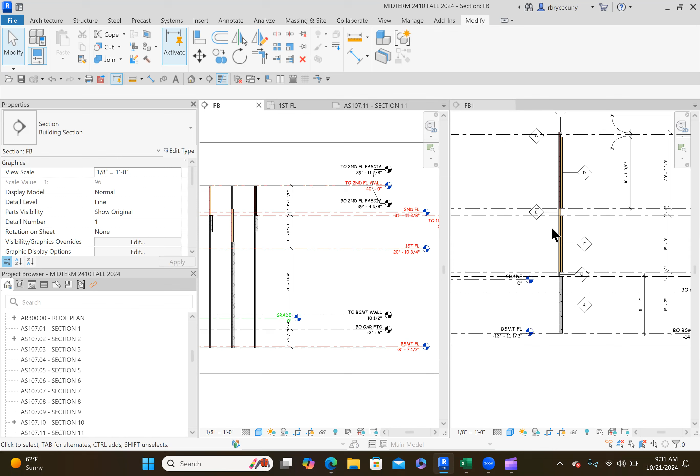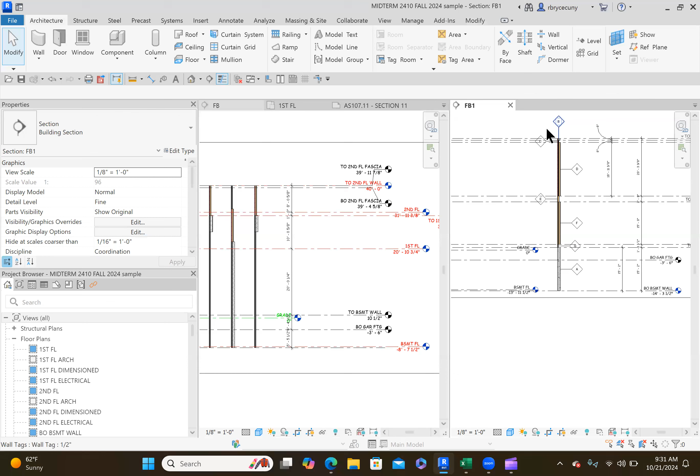Let's say that this was your handout. I'll give you a handout PDF, it'll be online, but take a look at it. Let's say this is the wall you want to duplicate. There's a couple ways to go about it. First is to get the levels correct and then make your stacked wall have these components. We've already made these components, but we haven't set up what they're supposed to be yet in terms of the composition of each wall type.

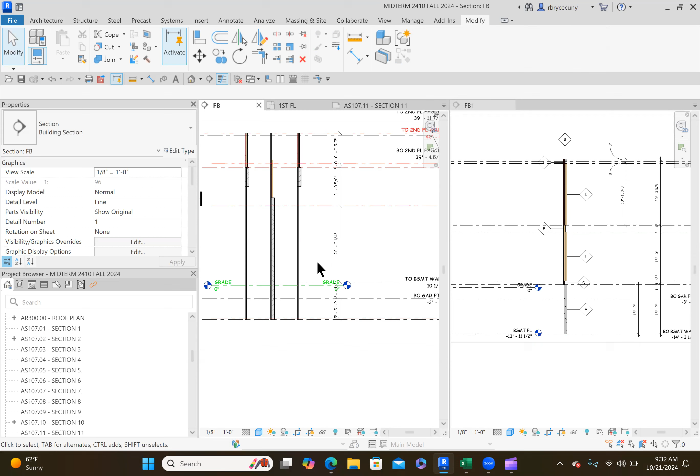So let's do the levels first. This is the handout, an example of your setup that you're bringing into class to begin with. So we'll take a look. There's a couple ways we could do this. Let's take a look.

The basement floor is minus 13 feet, 11 and a half. So we could simply do it this way. Minus 13 feet, 11.5 is the same as 11 and a half.

Now the bottom of the basement wall is 14, 3 and a half. So let's find the bottom of the basement wall. We don't have the label on this side, so we'll click this little box here and put the label there. We change that to the bottom of the basement wall is minus 14 feet, 3.5 inches. Okay, that'll put it down where we want the level to be for our project.

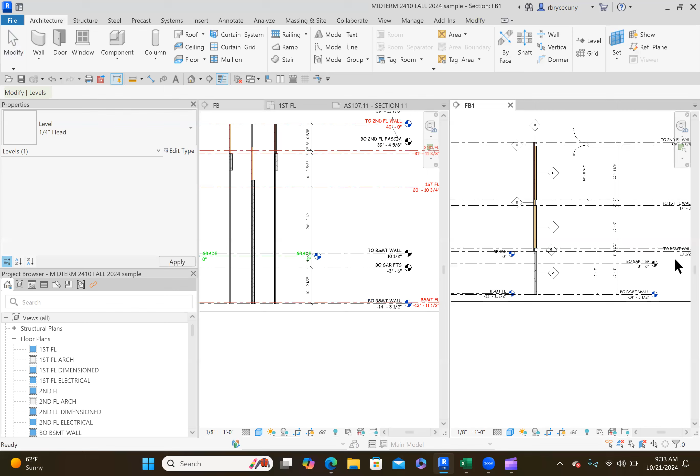And the next one is the bottom of the garage footing is minus 3 feet 6 inches. That's good. Top of the basement wall is what? Let's see, that's the top of the basement wall, 10 and a half inches. Okay, that's already there. The first floor is 2 feet.

Well, here's our first floor. Let's change that to 2 feet. We just click on it and let's unlock it. Let's keep these, this might be for the alignment, but anyway, 2 feet. We're going to change that level to 2 feet.

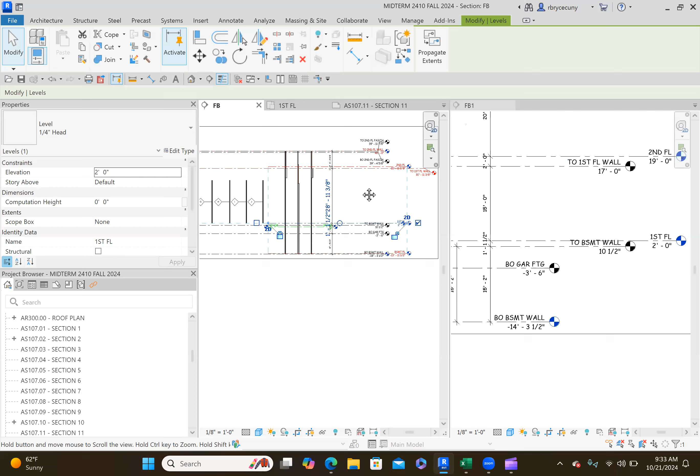Now the top of the first floor wall, where is that one? Here we go, top of first floor wall, 17 feet. And so what's left? Second floor is 19 feet, so we change that to 19 feet.

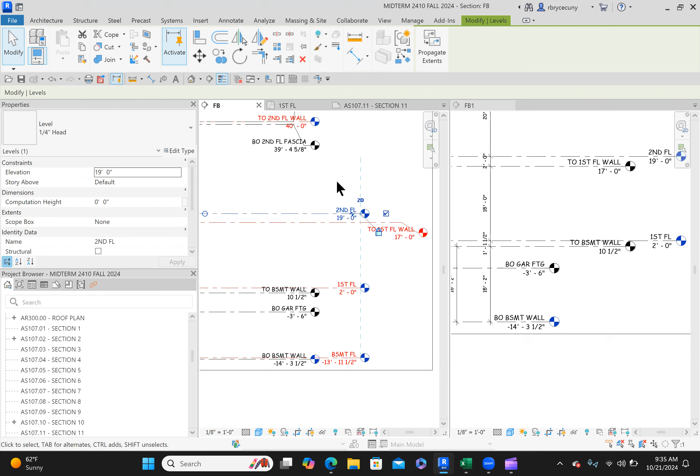And the top of the second floor wall is 39 feet, 3 and 3/8 of an inch. Okay, so let's fix that.

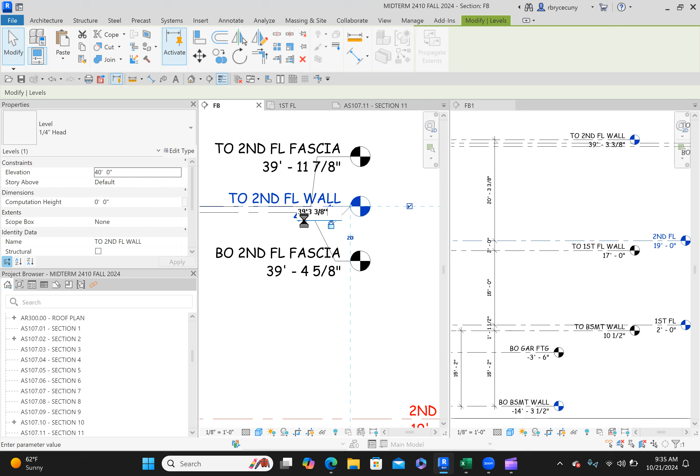And from there, we go down 8 inches and up 8 inches for the top of the fascia and the bottom of the fascia. So let's do that with dimensions. We're going to put our dimensions in here. Let's do that one too.

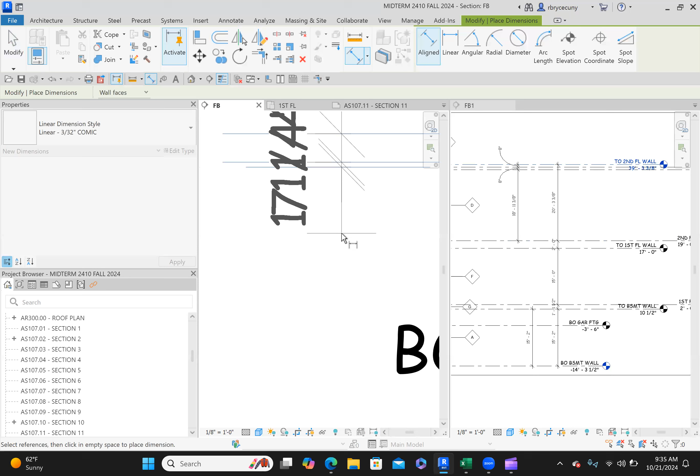Okay, so we can't see that. We can't really read them. So let's get them out of the way. So that's supposed to be 8 inches.

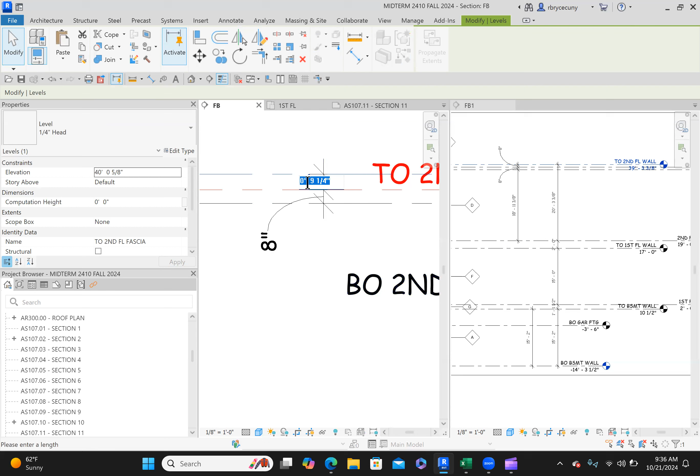So then we'll just click on this one here. We're clicking the object that we want to move when we change the dimension. And then let's grab this one and just drag it down so that it's below. Then we'll click on the object and say that should be 8 inches also. We wanted this to be 8 inches, but for some reason it's 9 1/4. So let's make it back to 8 inches.

Okay, and double check this. The top of the second floor wall should be 38 -- no, that's the bottom of the fascia. 39, 3 3/8. Okay, so everything's good. We can double check with our dimensions here. 20 3 3/8, yeah, 2, yeah.

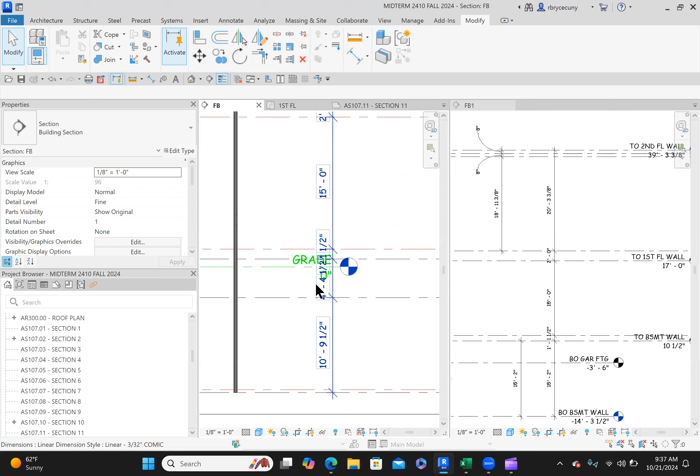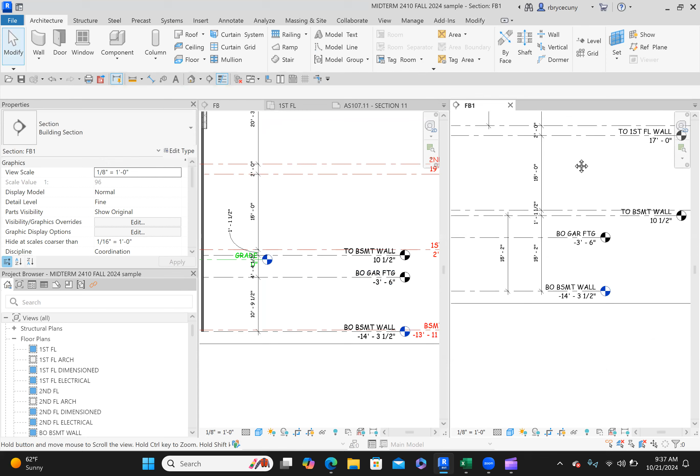Activate this view, top of the basement wall, and then 2 feet. Okay, let's see what's going on here. This should be 2 feet. We want to drag this over. And it is right, 10.5, 1 foot 1.5. That's correct. This distance is the one we don't know.

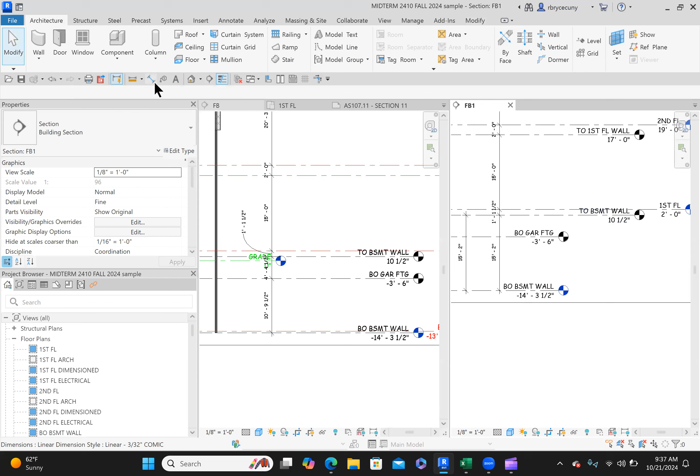So let's put a dimension in. Of course, I will give you this information. You don't have to do any kind of measurements on the handout. But let's see, what is this? 4 foot 4.5. Okay, so it's right. 4 foot 4.5. Okay, so that's step one. We get the levels right.

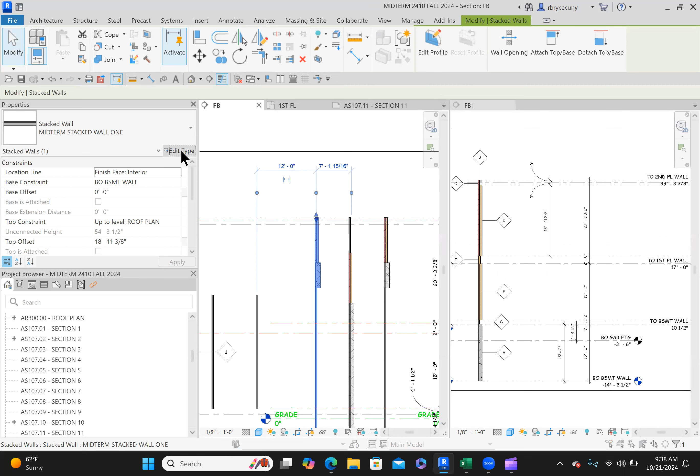Step two is we're going to change this so that it's made up of these components with these wall types. So let's click on our stacked wall, and we'll edit the type, and we'll edit the structure, and it's going to be B, C, D.

So the first one will be B. Let's see if we can find B. The second one will be C. We're looking for C, it is alphabetized. The next one is D. We're looking over there, it looks like a D. The next one is E. So we don't have any more, so we need to insert some more.

Okay, so it's B, C, D, B, C, D, E, F, G. Okay, that looks pretty simple. E, F, G, and I think we might have some more.

All right, let's see what we can do here. A, A is the bottom one. So we don't have one. We'll insert another row and we'll just make that A. Looking for A, there it is.

Now, what are the heights? Well, we know that 8 and 8 for those two. So we're going to change the height of that to 8 inches. We're going to change the height of that one to 8 inches.

Wall type D is 18 feet, 11 3/8. And that next one is wall type E, and it's 2 feet. Wall type F, 15 feet. And 1 foot 1.5 for G.

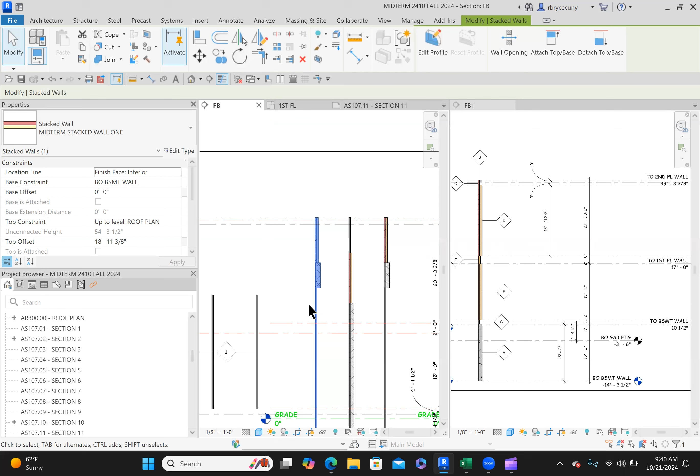And A is our variable, so we always want A to be the one that stretches. Okay, so let's say okay and see what happens. And it changed to exactly what this is made up of, letter-wise.

Now I'm concerned about this not lining up as it should. So I might have made a mistake here. Let's go back and edit the type again just to double check.

8 inches, 8 inches. This one is 18, 11 3/8. Yeah, 2 feet, 15 feet, 1 foot 1.5. Okay, that was wrong. 1 foot 1.5.

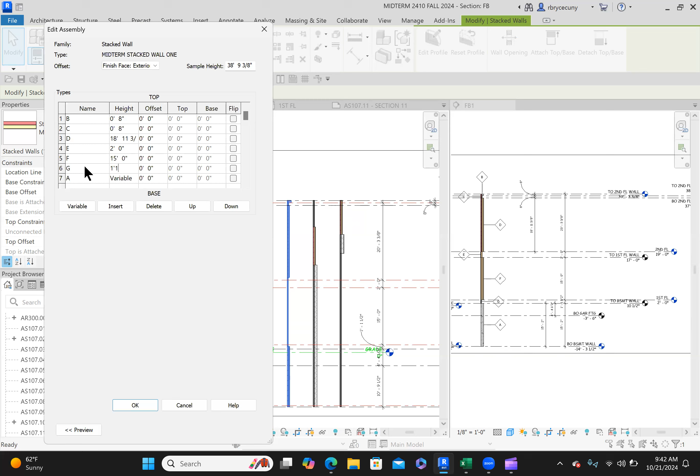All right, so it's telling me I've done something wrong here. 1 foot 1.5 inches. Let's see what happens now. Because we know that the walls, so that's 8 and 8.

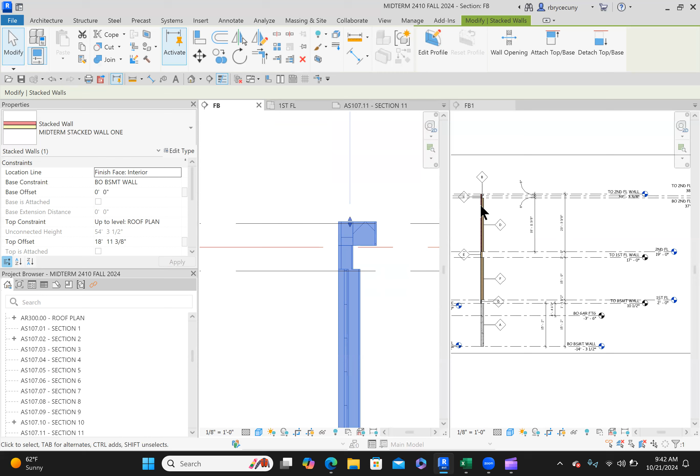And oh, here's our issue right there. Where is the top of that wall? The top of that wall should be the top of the second floor wall. Oh, and see, we got it set to the wrong level. Top of second floor wall. I like to show mistakes.

Okay, and it's top of second floor wall, and then it said add another 18 feet. So let's go back and say don't add anything to it, make that to the top of the wall, which it did. Okay, but I've got something wrong here because it should be the top of the wall plus 8 inches, right? Because this middle layer is that.

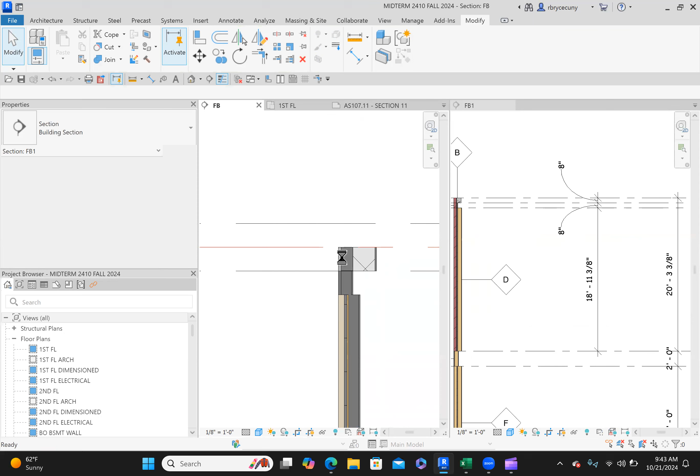So let's add another 8 inches to this wall. We're looking for the properties of this wall, so we're gonna, and then it should go up another 8 inches. See what happens. So we would say go to the top of the second floor wall, but then go up another 8 inches from there.

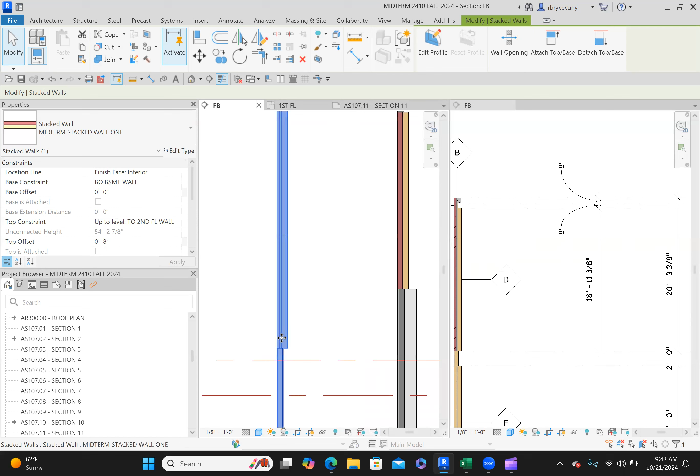All right, now see, I'm still confused as to why this isn't lining up. I like to show my mistakes, so let's try to figure out what that mistake is. 20 foot 3 3/8, 20 foot 3 3/8. Ah, here we go, look at that. That 20 foot 3 3/8 should be all the way up to there.

Okay, so let's fix it. Let's drag this guy up here.

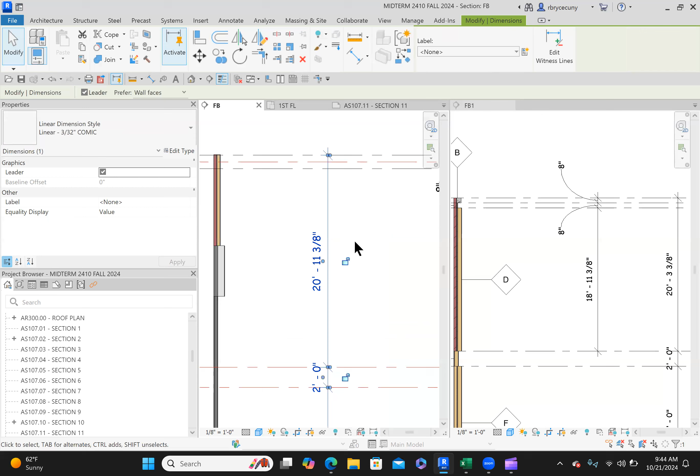And then I want to just do it, and then we'll fix the other ones. So I put it to the wrong place. 20 foot 3 3/8 of an inch should be to the very top of this assembly, and then 8 inches down for the red line, which is the level. So I want to make sure I grab the right one, and it's not the top of the fascia.

It's the top of the second floor wall. I can just drag that down any amount that I want, doesn't matter. And then I'll put the dimension in of 8 inches, and Revit will put it exactly where I want it to be.

So you can see that Revit did exactly what I told it to do, but I didn't tell it to do what I wanted it to do, because I made a mistake about looking at where that 20 foot 3 3/8 goes to. That's a possible mistake you might make, so you can double check. We always want to continually double check our work so that it makes sense.

You can see down in the corner here, our processing is done. Okay, finally. So I'm going to try to zoom out.

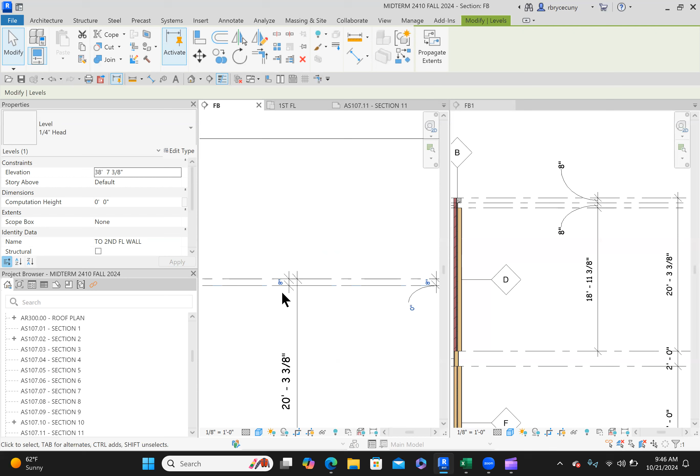So now, let's see, I have 0 inches between the top of the second floor wall and the fascia. I can't really grab it. Maybe I can, let's try to do that. We'll just pull it down and see what happens. Okay, I was able to grab it.

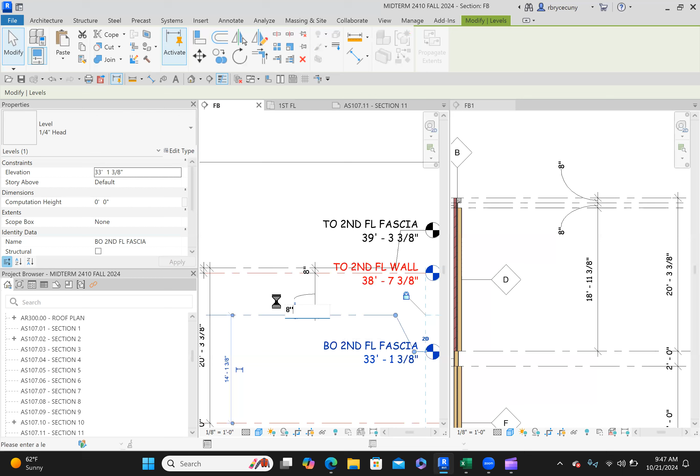Now see, the dimension is too much. If I click on that dimension first - well, I guess I already had this selected. So if I click on this dimension now, I can say 8 inches, and it will make the distance between the one end of the dimension and the other end of the dimension to whatever we say we want it to be, by moving the object that you've asked it to move.

Now, this is looking better. So let's tag our walls now to make sure we're good. I think it's annotate - let's try that first of all. Tag by category - let's tag these guys and see if we got the same ones in there.

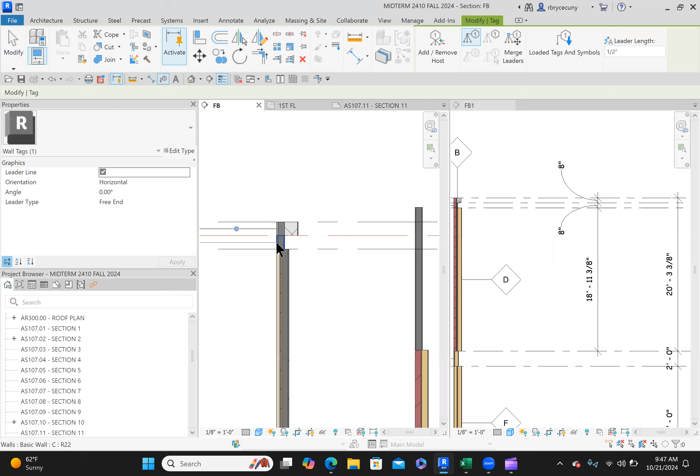Let's do it on this side. It's supposed to be B. The next one is supposed to be C. It is. This is D. This is F. We have one here. Yeah, we do, it's a G. And then we have this one, which is A.

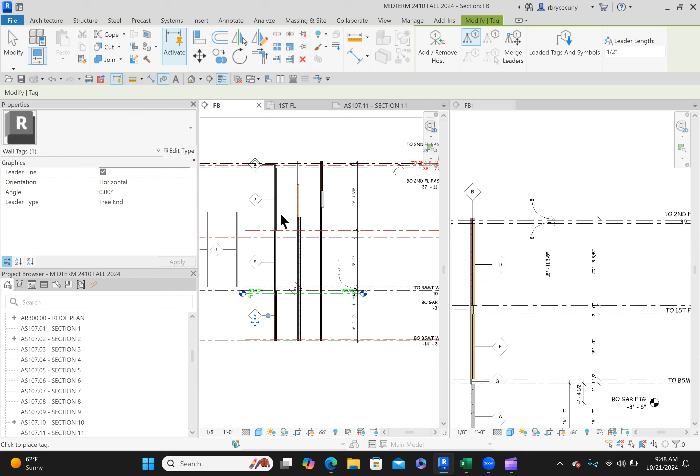That's our A wall. Now, we haven't changed the assembly of any of these walls yet, but we know now that we have the right order, and we simply need to change what each wall is made up of in order to do the next step. So the first step, you could change the wall types A, B, C, D, E by putting them in the correct order, and then you could fix the levels, or you could fix the levels first and then make the change. But that would be step one.

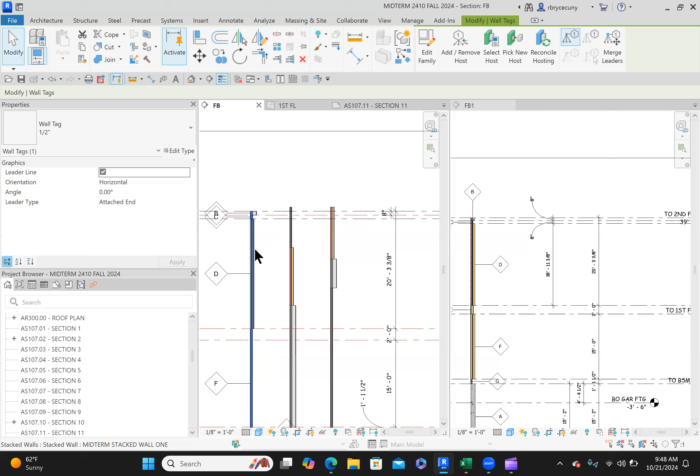Now, remember, you're going to take a look at what wall B is actually made up of, and I will give you that - I'll give you what all of those walls are made up as. And so that's a good place to stop for this phase.